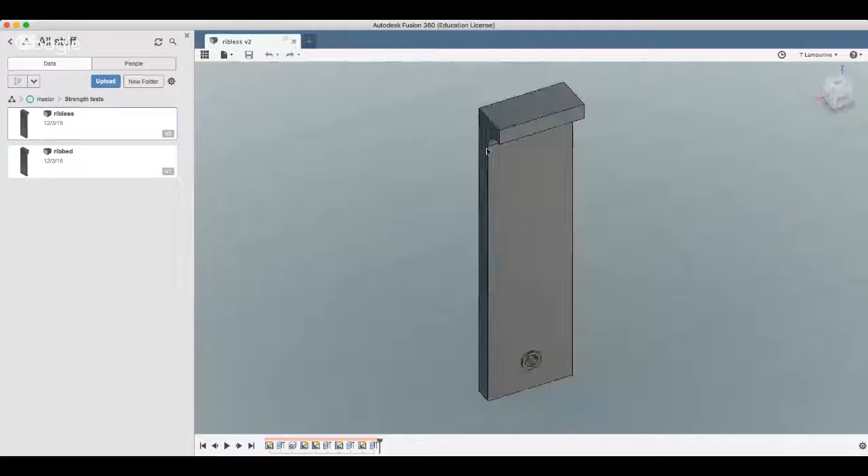As you can see, I have a ribless and a ribbed version, and all it is basically is a stick. This one's flat. I got a little hook here to hook my fish scale on, and I have a hole here to put a screw through and screw it to my workbench, which is the same thing I did before. Usually right about halfway is where the edge of the bench is, so it'll definitely break there.

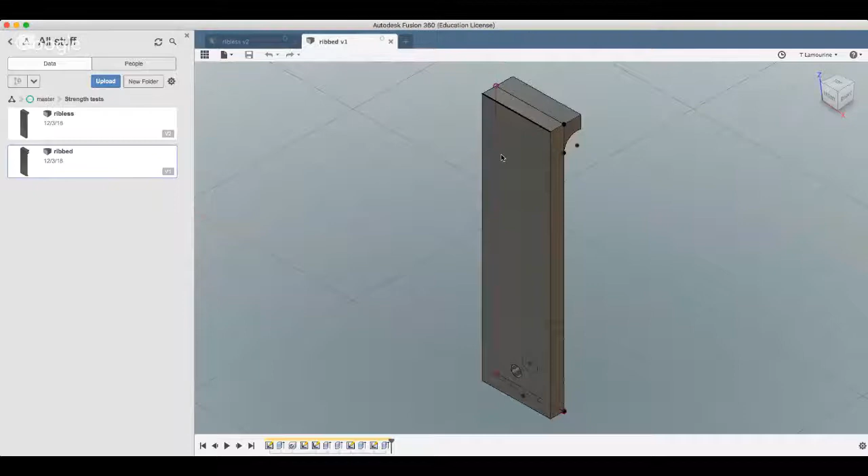And here's the ribbed one. Hopefully this is all showing up. Inquiring minds want to know. Yeah, and here's the one with ribs in it.

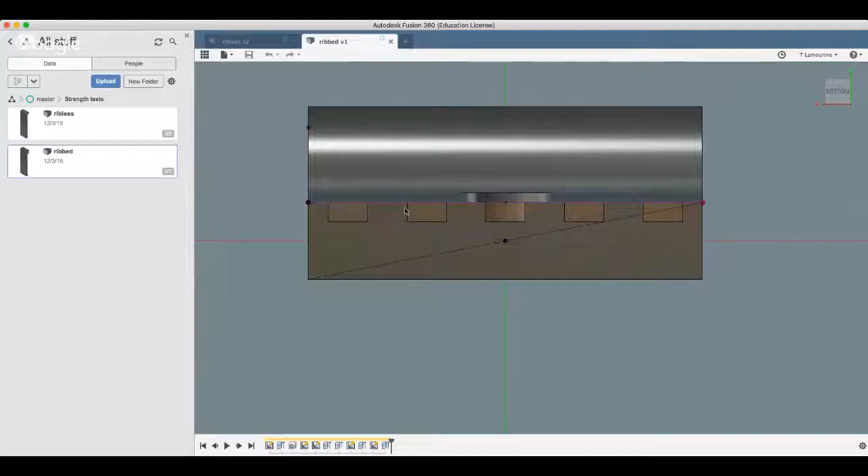I'm guessing, because if you think about it - why can't I orient this right? Use this stupid little orientation thing. There you go. Now if you zoom in on this, you can see my little ribs here are knockouts. When the slicer slices, it's going to see this as a shell here and put extra material here. So instead of just being a square across in this line with all infill here, we are going to have zigzags of shell material, which should, in theory, strengthen the part.

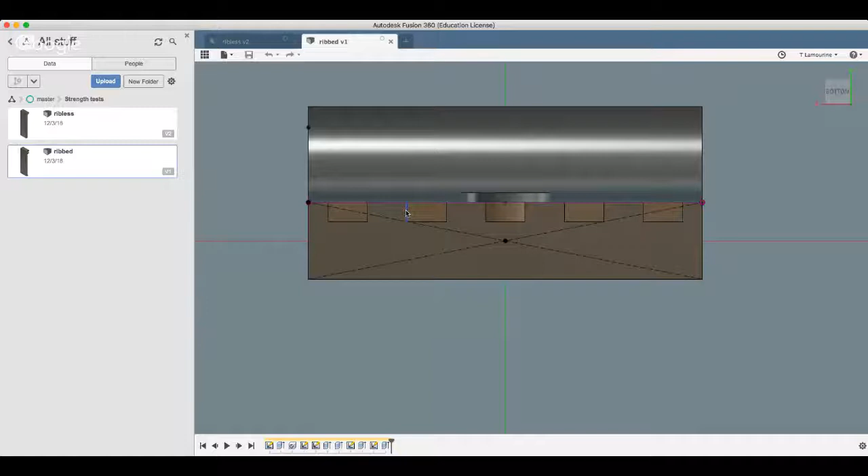And we're going to find out. So there's the parts. And what I think I'm going to do...

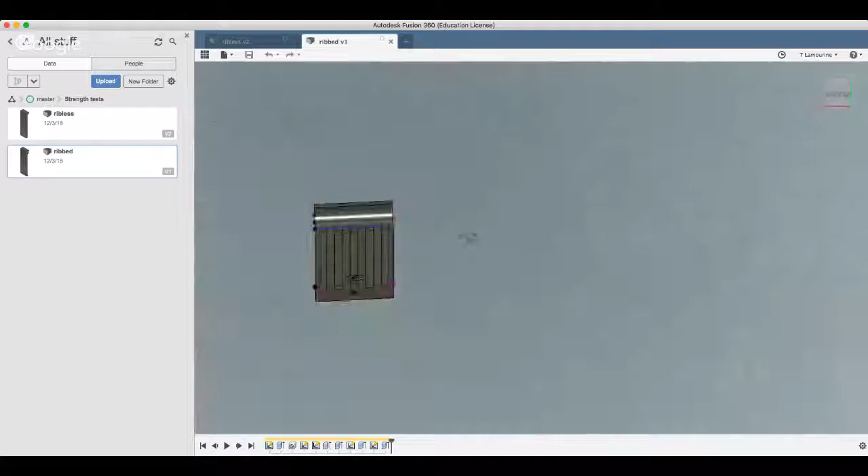...is have some other people do it in other materials to see if it's even material dependent. So if somebody prints a lot of ABS or a lot of PETG, send me a message and I will send you these very simple files so you can make your own. It doesn't have to be exactly the same, as long as you print them all the same, and see if it helps. My plan is to print it at like 20% infill with 3 or 4 shells.

And go from there, and see if it actually adds strength. I'm thinking I'm going to also do some in both the ribbed and unribbed with just literally 10% infill and 1 shell, and see if that helps. If that makes any difference having it ribbed or not, if it gives it an extra couple of foot-pounds of strength or not.

Hot chocolate's so good. I love hot chocolate.

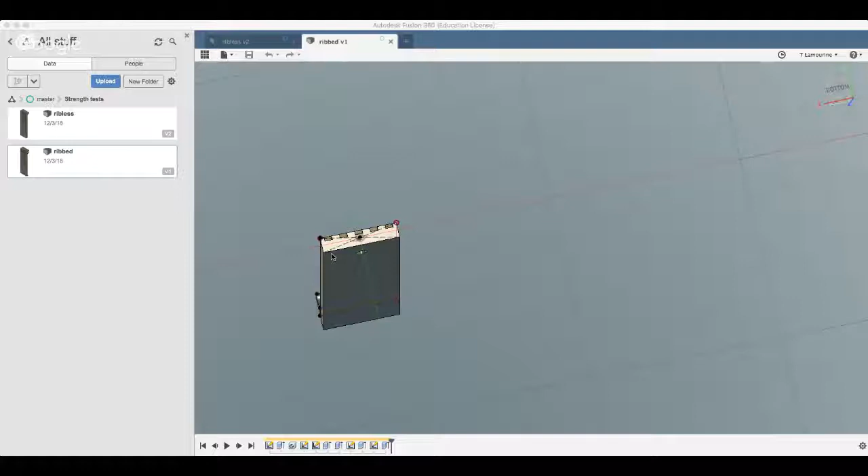But yeah, I was waiting for my new camcorder here. Let me go back to the stop screen sharing. I was waiting for this new camcorder because I dislike this one.

And I shouldn't say I dislike this one, this one works just fine. The video quality is comparable, if not, this might actually be slightly better than the Sony. I just don't like the file format. It's Sony's proprietary AVCHD crap.

And it's just a pain in the ass to import and export, and you can only do it through their stuff. And even if you take the SD card out and put it right into the computer, you have to use it. Will only let you do one video at a time, and it's just a pain in the ass. This is a regular Canon.

I can plug into it. It's got a button here, hit play, plug the cable in. The Mac sees it. When I'm using a Mac, I can download the files. They're all MP4, not some proprietary crap that I have to convert when I import. So I've been waiting for this to do the video, and I finally got it.

Now that it's found, and on that story, should I go into that story? Sure, why not? So I ordered this from B&H Photo out of New York, or Boston. I think they're out of New York. They're out of New York. I know they are, they're on Long Island, but they're really in New York City. Anyway, very good company, I buy a lot from, actually my video camera I'm recording on came from them.